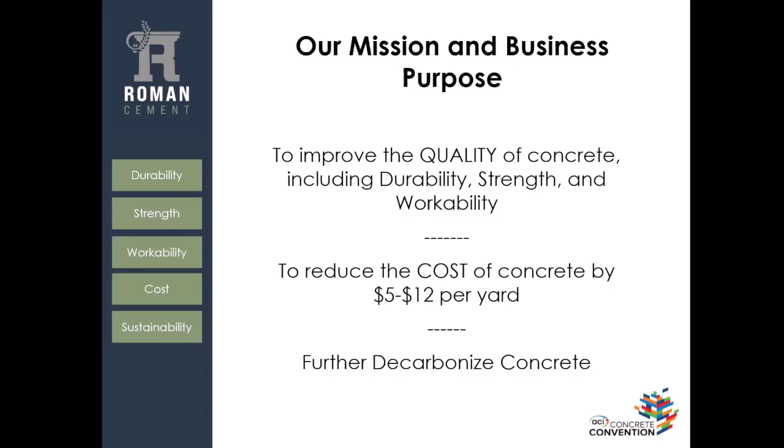We were able to redesign several mixes of ready-mix companies in California and in Utah, and from the materials cost standpoint, reduce the cost by $5 to $12 per yard. We were able to improve the quality of concrete. We don't try to increase the strength, we try to match the strength, but we did some durability tests and they came out very good, and the workability is very good. Even though we call ours a low-carbon concrete, because of the way we use a mineral filler, we're able to maintain very good workability.

So everybody knows this. Okay. Yeah, sorry. Okay, so everybody knows that...

Typical concrete always has cement and one or more supplementary cementitious materials. And of course, the point is to create better concrete, to react with the cement, and to make a greener and more sustainable product. If designed right, you get very, very good concrete using those materials.

Like I said, we've always looked at a ternary blended material. Ideally, the cement, the SCM, and the mineral fines wouldn't have the same particle sizes, but in this case, the SCM we used was fly ash, which had about the same particle size as the cement, and then our mineral fines were a coarse limestone powder that we found off the shelf. But we were able to use it to reduce cement content significantly and make what we believe would qualify as a low carbon material under 323, without the workability issues you might have if you reduced cement paste dramatically.

As we know, typical supplementary cementitious materials like pozzolans, fly ash, and slag will have a strength retarding effect.

They ultimately yield great strength, but early on they have a retarding effect. By using this coarse limestone powder, it has an accelerating effect, so they offset each other, and we get very good results.

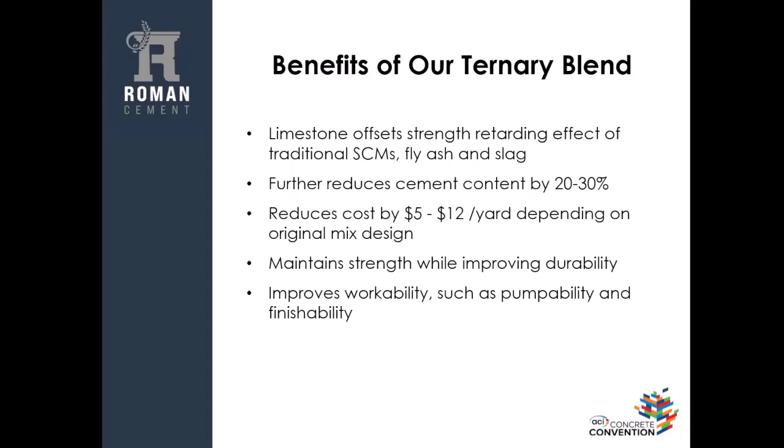So anyway, here I'm going to get into the mix that we redesigned. Again, this is just an impressionistic version of our idealized cement material. Okay, so this here would be the mix design.

This is the city prescribed mix design: 489 pounds of cement per cubic yard, 122 pounds of fly ash per cubic yard. We reduced the cement by 20%, nearly 100 pounds per cubic yard, and reduced the fly ash by 15%. So the total cementitious went from 611 pounds per cubic yard to 495 pounds per cubic yard.

And then we replaced that with 150 pounds of pulverized limestone, which still was quite a bit less expensive than both the cement and the fly ash, so ultimately the cost went way down, even though we had to use a little bit more admixture to get the right flow. But we had a target air content of 6.3%, and the slump had to be about 5 inches.

We did this project for the rechargeable bus station, and we found that it pumped well. It seemed to behave exactly like the concrete that everybody's used to. It finished well. There's the aerial view of how the bus station ended up looking.

Here is a letter of commendation from the contractor who did this, and they liked the fact that the concrete met or exceeded their expectations in terms of workability and how it flowed.

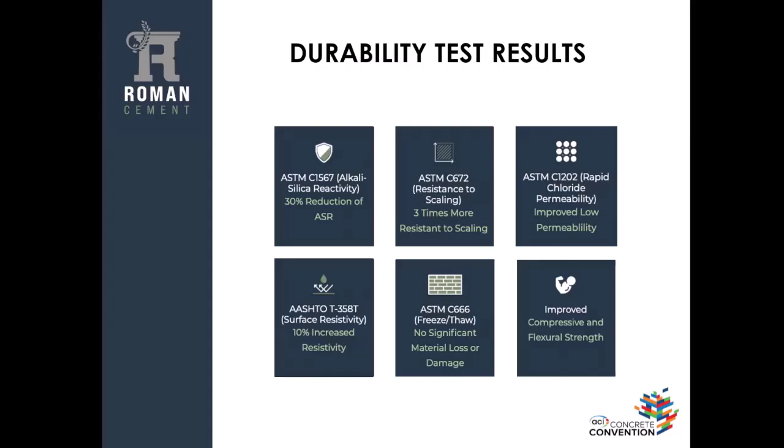Theoretically, it's because our cement paste matrix was less porous, since we have a higher particle-packed cement system with the limestone powder. We improved the rapid chloride permeability test, and surface resistivity went up. Freeze-thaw was about the same. And we had improved compressive and flexural strength compared to the control mix.

Some of our partners we want to thank: the City of Salt Lake City funded the project for the bus stop. UTA, the Utah Transit Authority, for the rechargeable bus station. Geneva Rock was our concrete producer. Stacy and Witbeck was the general contractor. CMT was our engineering firm who did a lot of our testing before we poured, and Altiview helped us do the durability testing.

That's all I have, and I was curious if anybody has any questions. Any questions for John, Director?

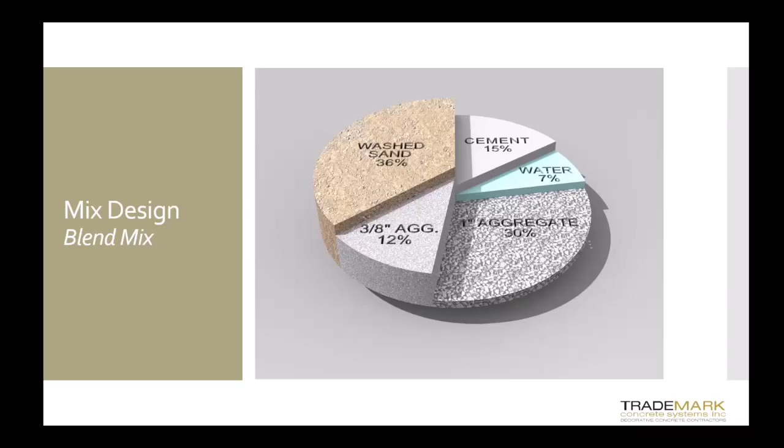We used a blended mix design, pumpable through a 3-inch line if needed. We were limited with some access issues at the grounds there. Probably the biggest hurdle when it came to concrete was the temperature—110 degrees in Sacramento in the middle of summertime. So we worked with Cemex, the ready mix provider, and we were able to get concrete at 5 a.m. every day just to make sure we could control our pours.

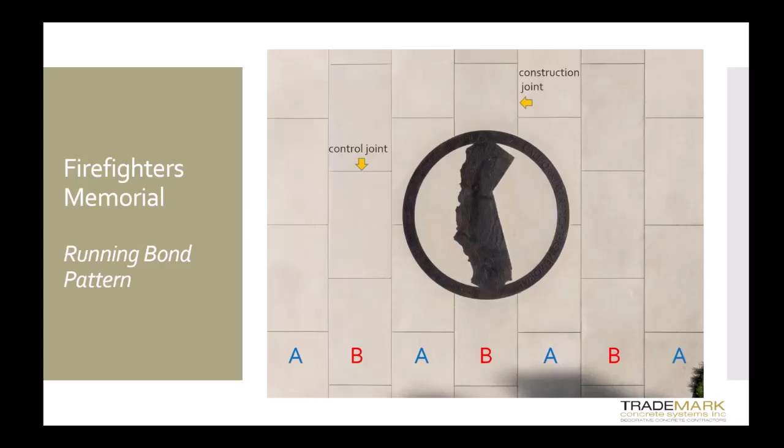We had a 3/16 saw cut control joint, with isolation joints at the vertical structures. There were benches and sign walls that had template sandblasting, which you'll see in some upcoming photos. Here was how we poured it—you can see the control joint versus the construction joint. Centered in there is a bronze inlay that's 8 feet in diameter, so we softened the coastline a bit to prevent cracking. We poured it in 3-foot wide lanes in the running bond pattern and used a color hardener for the final color.

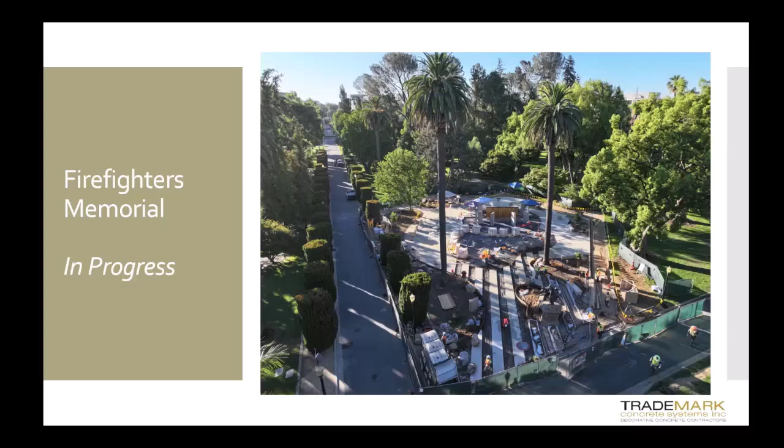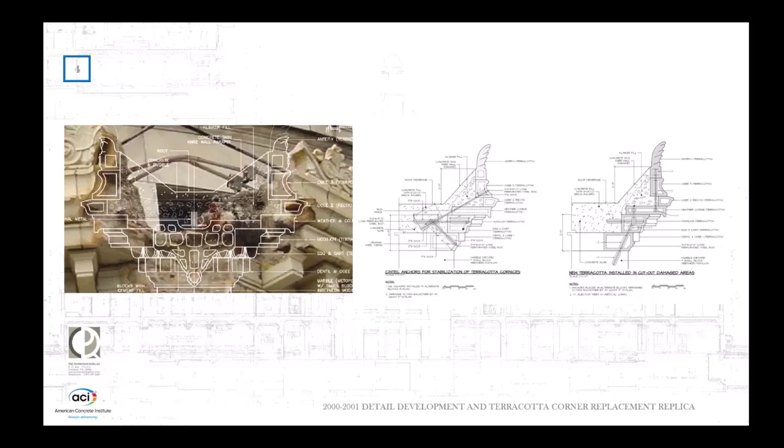This is the first time I've ever heard of Cintec, which you see some sketches of here. We spent about 4 hours doing sketches of how to preserve the 7 courses of terracotta so that we could, at the same time, understand how to reattach them. If we dismantled the corner, it was not that hard to put back, but we were trying not to dismantle the entire cornice with the base of the Capitol.

That was some time that we spent, and again it took us like 5 or 6 years to get another project back on track. At the same time, I had convinced the superintendency to go ahead and do the molds for the terracotta pieces. To give you an idea, there are 7 courses of terracotta and 1,568 pieces overall around the base of the Capitol Dome - that's how complex this thing can be.

When we started this project, we understood we had sort of a crisis because other areas started seeing some modillions falling at the same time. We even made the newspaper - it said the building is falling apart, and time is passing on the building and making it worse. At the same time, at the main entrances, we were seeing some collapses and so forth. So we were trying to make this - instead of historical preservation, hysterical preservation - to get the message through.

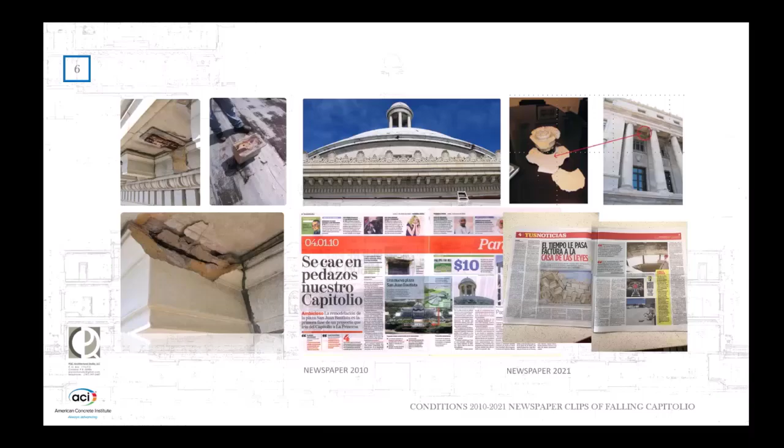Finally, we go all the way to 2022, and we got called by the superintendency because they were trying to do a restoration of the mosaics in the atrium. I told the superintendent, you can't do that unless you do the dome first, because it's the highest point in the Capitol building, and you need to address it.

Being architects for the superintendency since 1985 or 86, we had 30-plus years of collecting, because I took it as a passion or a mission to collect every single drawing I could of the Capitol of Puerto Rico, and this proved to be essential for our project.

I even got the original structural design of the Capitol - a 1924 drawing, hand-drawn, and these sections you see there are also original drawings. These photographs show that in 1929, this is the era, more or less, where the dome was being built. So these photographs were all instrumental in us understanding what we were dealing with, in essence.

So now we have the project. Thanks to the digital drawings, all our terracotta pieces were organized sort of like a Lego puzzle, each one with a specific code. Gladding McBean, the supplier, was convinced by the superintendency to purchase the terracottas in advance, because terracottas take anywhere from 4 to 8 months from original intention to actually getting the material on site. So we purchased the terracottas ahead of time when we finally decided to bid the project.

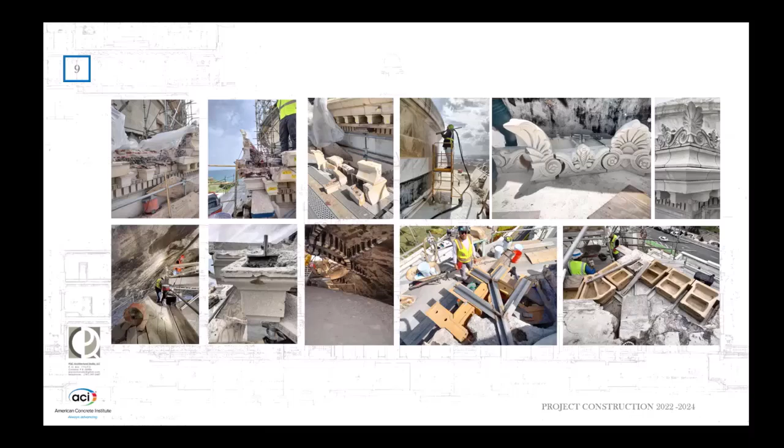So what happens after we get all these drawings? We went into the bidding process, and we were fortunate, what I call a double whammy, because we got a contractor that happened to be a structural engineer also. We had Izquierdo, and then we had the contractor Jose Gaya from BPMT. I'm trying to abbreviate this very complex process, but the corners could be easily installed, while the other pieces were done in Cintec, and Izquierdo will go into more detail with this.

As you can see, the pieces had to be hand-colored. Edison Coatings was the supplier for some of the finishes for the terracottas and so forth. And here we are seeing the results of the final project.

And we were able to preserve the interior, which is the mosaics. Well, the architect always wants to fix more. We're done.

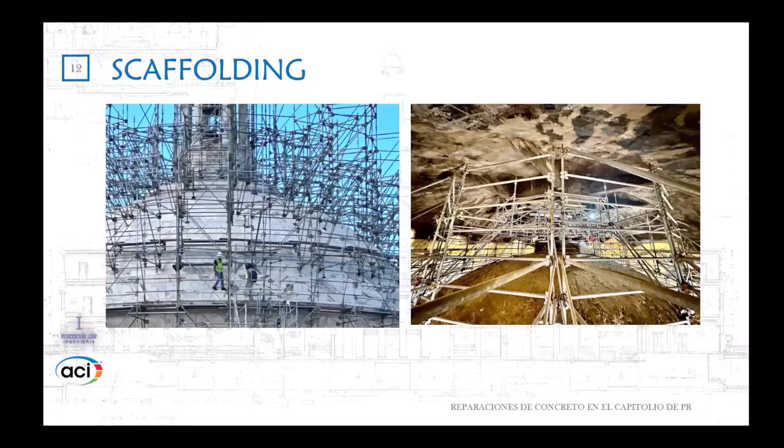Let's try to do this in 2 minutes. A recognition to the scaffolding guys, they did a fantastic job. All the exterior scaffolding is curved. The interior between the two domes is curved, and it was essential for the performance of the contractor.

This gives you a section of the original construction plans, which we were able to review and verify the rebars. You can see there are two domes, both made out of concrete. The one that caused us trouble was the exterior dome. We don't have time to explain the complexity of the structural system, but the inner dome is not supported directly into columns down there—it's supported between beams, circular beams, and other columns.

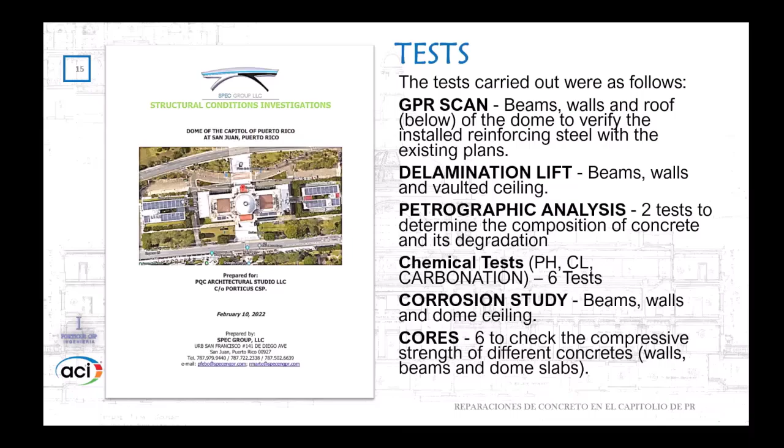We did what is very important, according to ACI Code 562: testing everywhere. It was a great lab, the spec engineers did all kinds of testing. And the important finding was this: we found extensive honeycombing in the exterior dome from 1926. We think that because they were afraid of the big angles of the dome, they used a very dry mix. ACI had only existed for 15 years when this was done, and the code was just 16 pages, published in 1910.

This was a big problem. If we had to repair it from the outside, we would have to take out the marble, and the project would have gone nowhere. So thanks to the support of Master Builders, now Sika, they recommended a micro cement to inject from the inside—a micro cement used to stabilize tunnels inside mines.

Following the diagram on the right, we injected every 16 inches in circles from the bottom up, always from the bottom up, using low pressure injection, only 30 psi. We just wanted to fill the voids, and the contractor had to watch that there would be no micro cement coming out on the exterior to damage the marble. It happened about 5 times that the micro injection went outside.

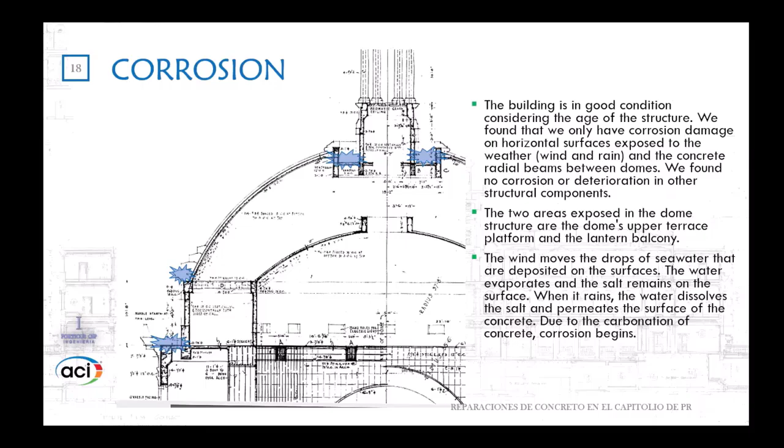The basis of the corrosion was on horizontal surfaces between the dome construction, where salt water, like Pablo said, deposited. Every time it rains, the salt water goes inside the structure, and that's why they were using these repair techniques.

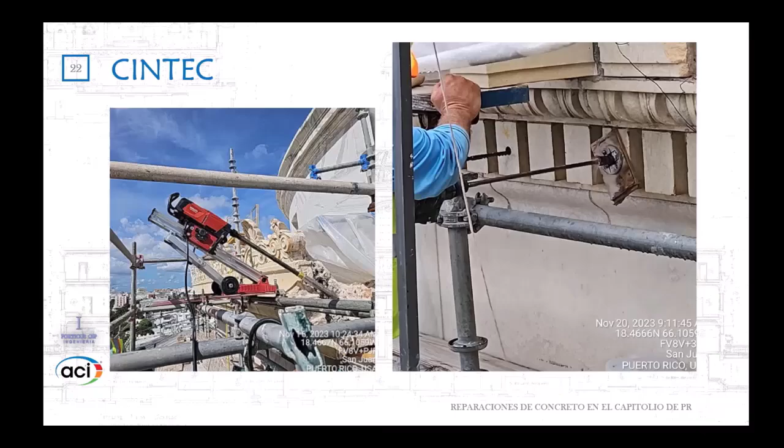It's very important to detail the drawings—photos of the damaged beam, the repaired beam, and the terracottas which had much larger damage. This shows you the process of the Cintec. This is a very important European technology: the rod is inserted into a good attachment area, solid, and then it goes in with what you call a sock, and then you inject a grout, so it grows and makes everything bond together without causing extra stress. Then you tighten the rod and everything stays in place.

The contractor made a redesign after we saw the extensive damage. This is on the corners—we needed to do some extra structural work. We used stainless steel angles and concrete beams, and it was injected.

And I wanted to show these 2 pictures. At the end, artists with a small spatula finished the project, to make sure that all the ornamental terracotta blended. We received an award from the architects in Puerto Rico, and we're very humbled by the ACI award. Thank you.

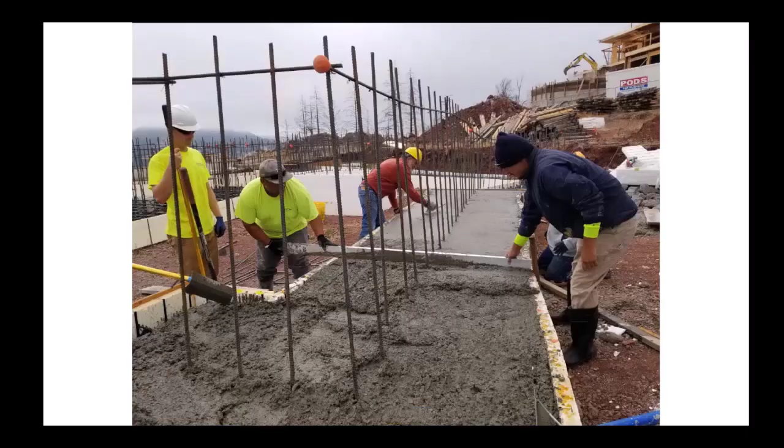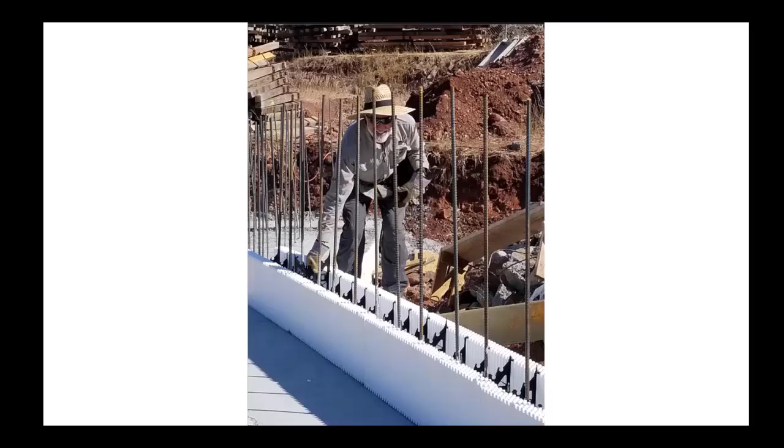This is the placement of the first row of the ICF forms. Again, there's the styrofoam, the brackets that connect them together, and the other piece of styrofoam. Those black brackets actually are the studs in the wall to mount whatever you want, drywall, whatever it might be. So when the wall is finished, you're done. There's no wrapping, no insulation. Put your brick or siding on the outside, drywall on the inside, and you're done. It makes this process really, really fast.

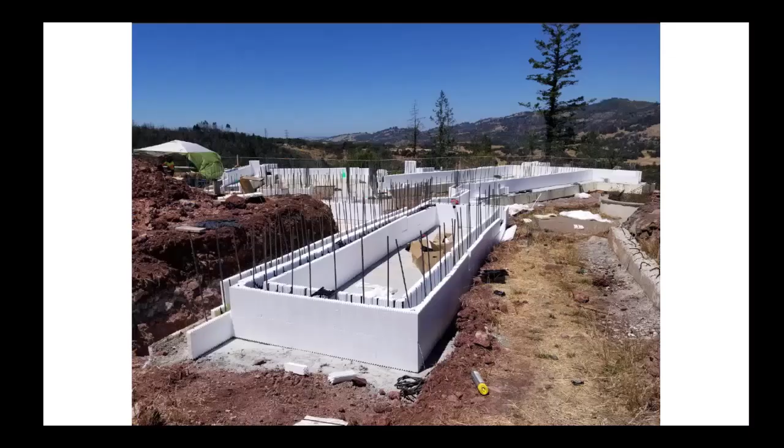This is the first row of forms going in, sorry. They're putting in the slab rock to fill it, and then doing the same there, and they'll be compacting it as they go along.

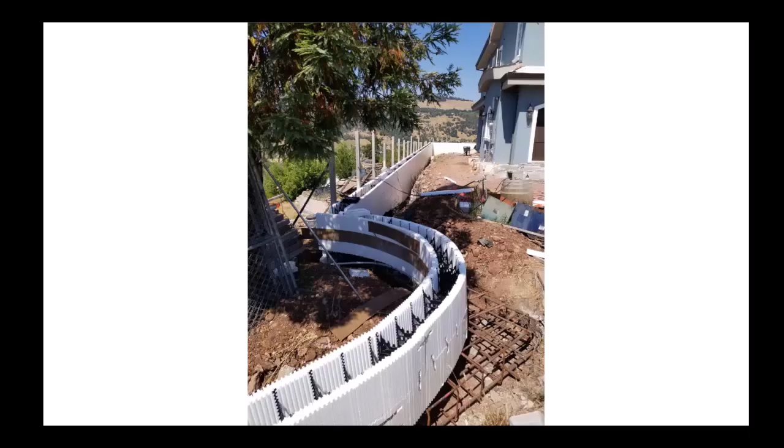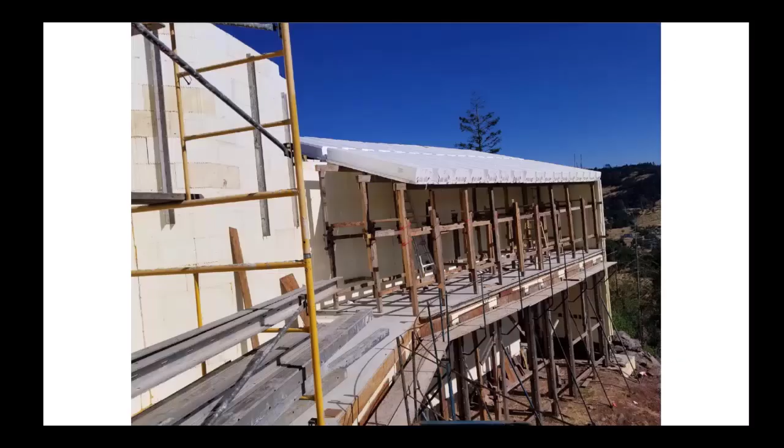This is the second floor of ICF walls going up. And then this is the cantilever balcony, which is another innovative thing that Nicholas developed. A lot of people that do ICF walls don't do ICF roofs. Nicholas has been doing them for 5 or 10 years now, and he's invented the whole process of getting that concrete roof done at the same time you're doing the walls.

So again, at the end of the day, you end up with a cave above ground. And if you've ever been in a cave, it doesn't make any difference what the temperature is outside. If it's 25 degrees, it's 67 degrees in the cave. If it's 100 degrees, it's 67 degrees in the cave. It's the same thing with an ICF property.

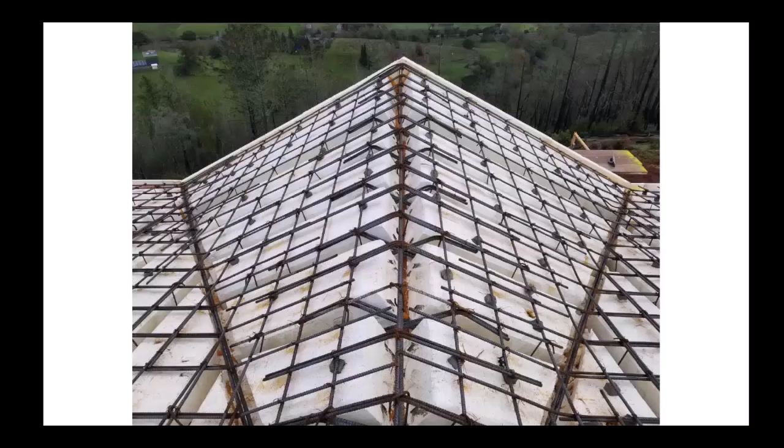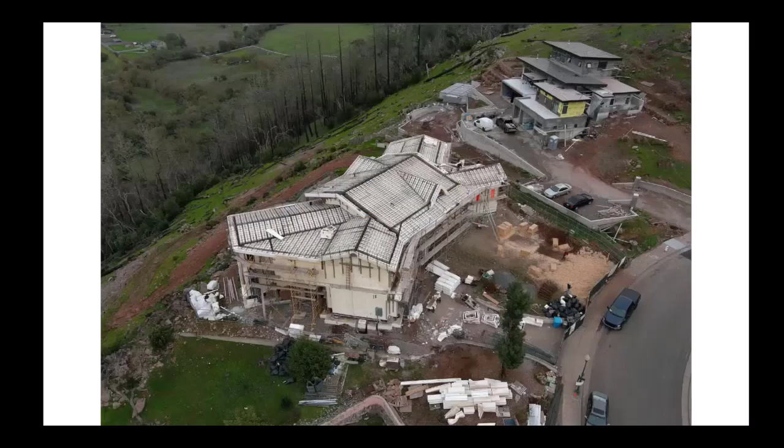This is the ICF roofs, the outdoor roofs getting ready to be poured, and the pillars again. Here's them actually pouring the ICF concrete into the roofs. Another shot of them pouring the upper walls and the roof. Here's a drone shot of the completed roof section, getting ready to pour again, and that's a completed shot of all the wall structures and roofs, all done and poured.

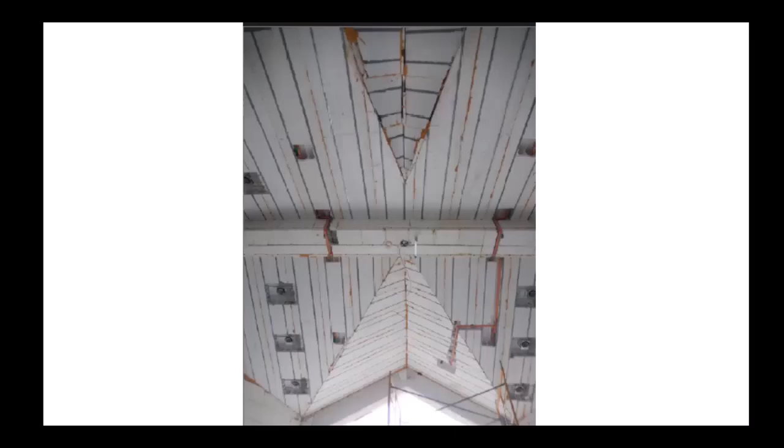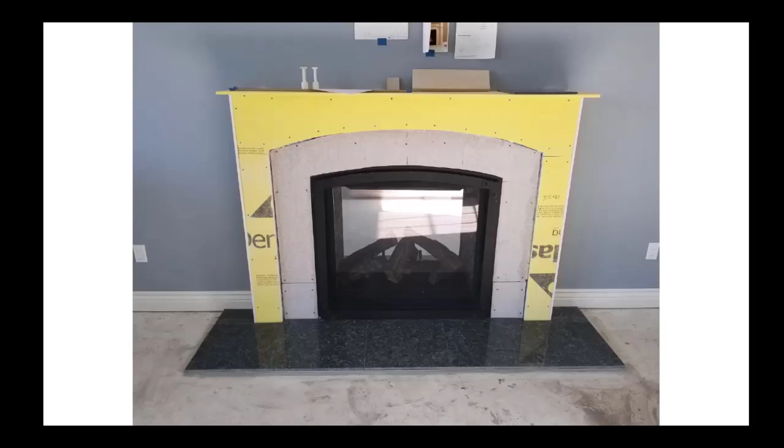This is the framing of the double-sided fireplace, and then the finished fireplace. And then the double-sided master bedroom fireplace, and then the finished fireplace. And this is IntegraSpec's demo

They do this at all the World of Concrete shows and builder shows that they do. So that's it. Any questions?

I'm in the Maryland area. I live in Columbia, and we're actually promoting ICF in this market. It's becoming a more popular way to build houses, especially since people are pushing net zero and want a nice, quiet home. So if you ever need to reach out to me, I'll give you one of my cards, and we can talk about how that might happen. And we are looking for builders and people that want to learn this technology. Thank you so much. Good. Thank you, Tracy.

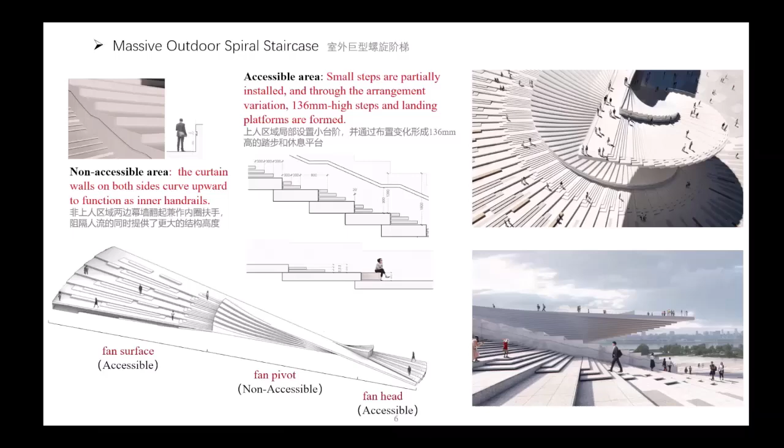The fan surface is a steel frame structure composed of circular main beams and radial secondary beams. Circular supports are arranged at the edge of the fan surface to ensure the stability of the overall structure.

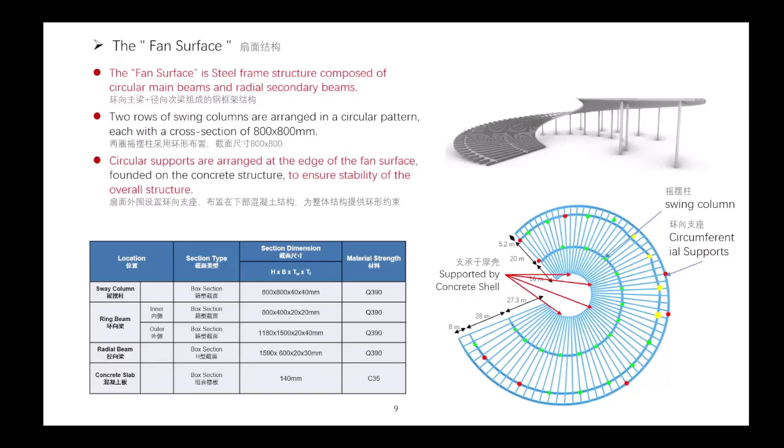The cantilever length ranges from 9 meters to 15 meters, accounting for the architectural finishes and the ceiling construction. The effective height is only 725 millimeters, so the span to depth ratio is 21:1.

The cantilever beams are prefabricated pre-stressed UHPC beams arranged radially and anchored to the concrete shell. Adjacent prefabricated UHPC beams are connected with cast-in-place UHPC joints to form an integrated structure and achieve waterproofing and durability of the outdoor staircase.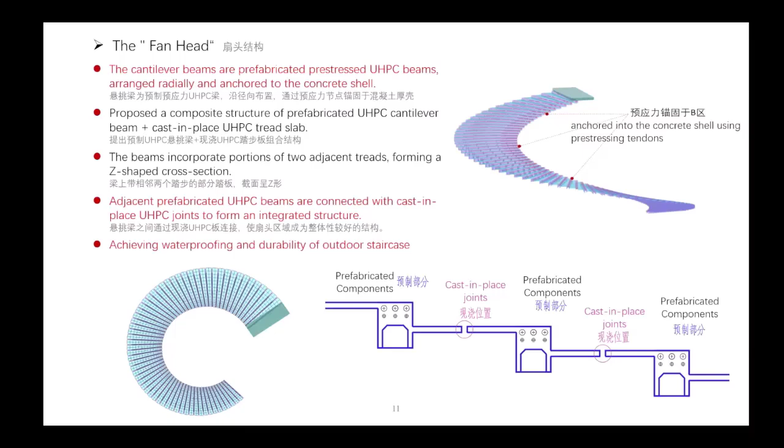The UHPC beams are connected flush with the bottom of the concrete shell. The compressive strength of UHPC is 150 megapascals, and the tensile strength is 8.5 megapascals. The cross section is formed rectangular to a Z shape, minimizing the self-weight. Pre-stress is applied to fully utilize the high compressive strength of UHPC.

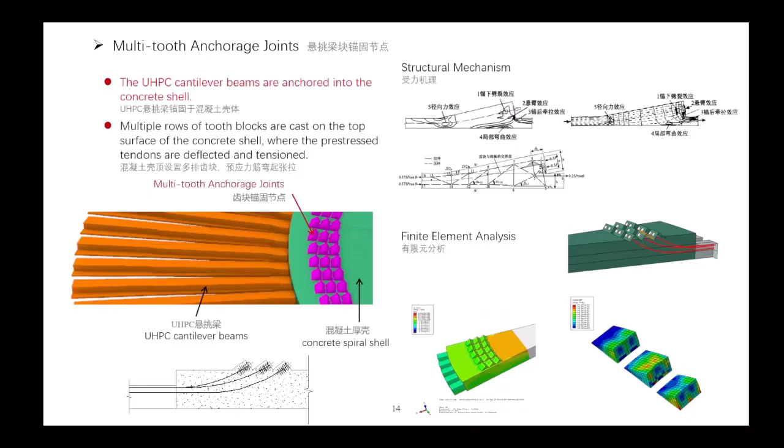The UHPC cantilever beams are anchored into the concrete shell. Full-scale tests were conducted on 2 UHPC cantilever beams, and the maximum test load reached 1.7 times the design load, with a maximum deflection of about 770 millimeters.

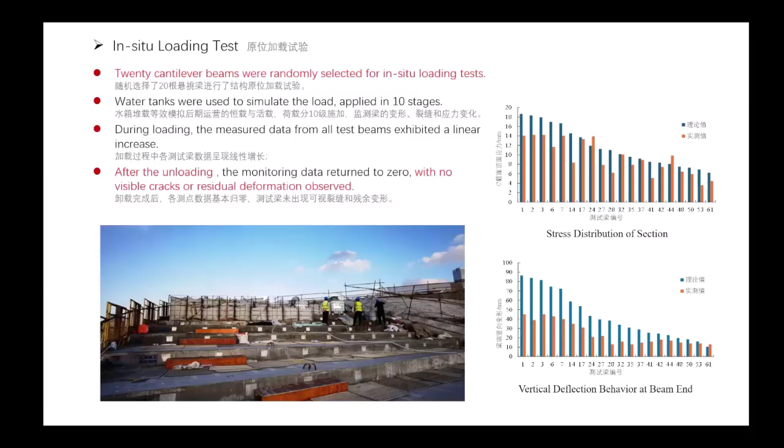A total of 45 mass dampers were installed. The results showed a significant reduction in vibration by 47%.

Through collaborative optimization of design and fabrication, only 2 sets of steel molds were used. Mass production was achieved using conventional concrete precast plants.

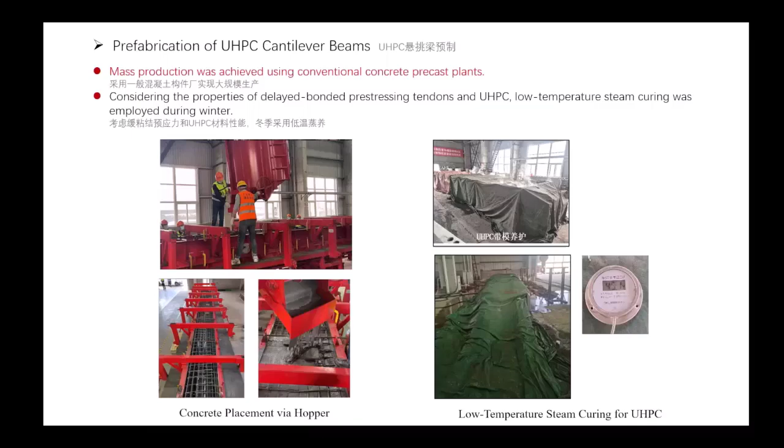This is the construction of the concrete spiral shells and the installation of UHPC cantilever beams. These are the key construction milestones. The roof started on July 1st, 2022, and topped out on October 21st, 2023.

A summary of the construction.

These are some photos during the construction, and the architectural finishes and decoration were finished.

Two weeks ago, the Global Engineer Congress was held in Shanghai, and engineers from more than 60 countries visited the project. The key innovation of the project is the seamless integration of architectural design and structural technology, along with structural testing, in situ loading tests, and structural health monitoring, validating the safety and serviceability of the new structural system. The Shanghai Grand Opera House marks the first application of UHPC technology in large-scale public buildings in China.

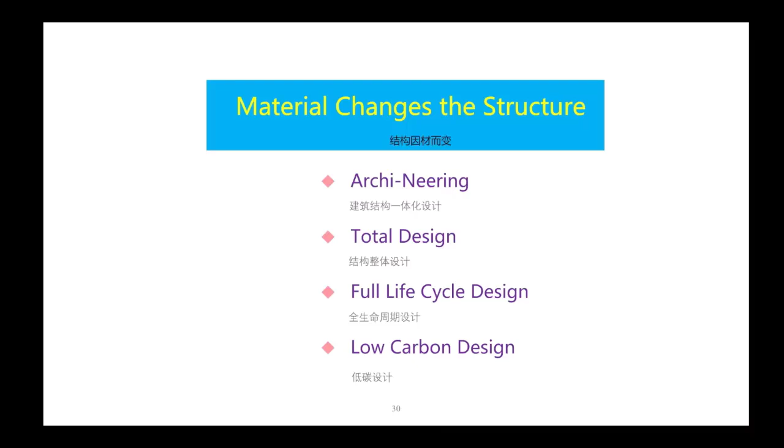In short, it's high-performance materials changing the structure through archi-neering, total design, full life cycle design, and low carbon design. At last, I give thanks to the owner and the team, including architectural design, structure design, general contractor, UHPC supply, and so on.

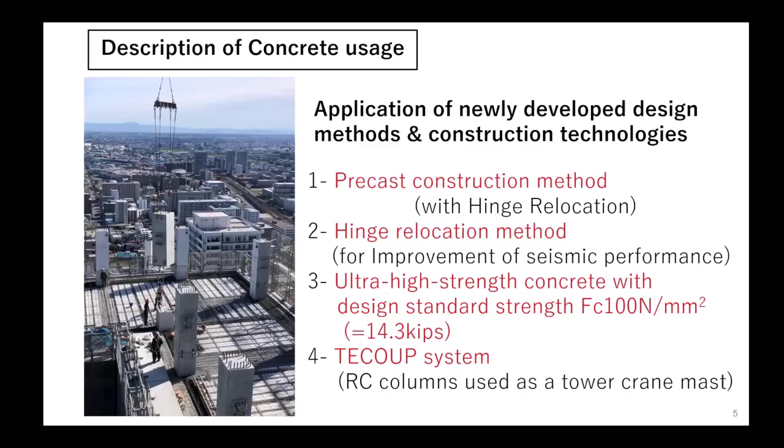First, the precast construction method with hinge relocation method. Hokkaido has a lot of snow, so construction work is restricted in winter. To shorten the construction period, it was necessary to use precast members for the entire building. Japan has a lot of earthquakes, so tall buildings are designed with a moment frame structure.

Especially in a super high-rise building, the structure is a complex concentration of rebar at the beam joint. High viscosity concrete is difficult to cast inside, so it's best to use full precast columns. So all columns were full precast members.

In addition, beams of 2 floors and above, slabs, balconies, and corridors were made with half precast members. As a result, about 65% of concrete is precast members, so we achieved a 5-day cycle per reference floor. If concrete was cast in place, it took about 20 days. Not to mention, the formworks of concrete members were greatly reduced.

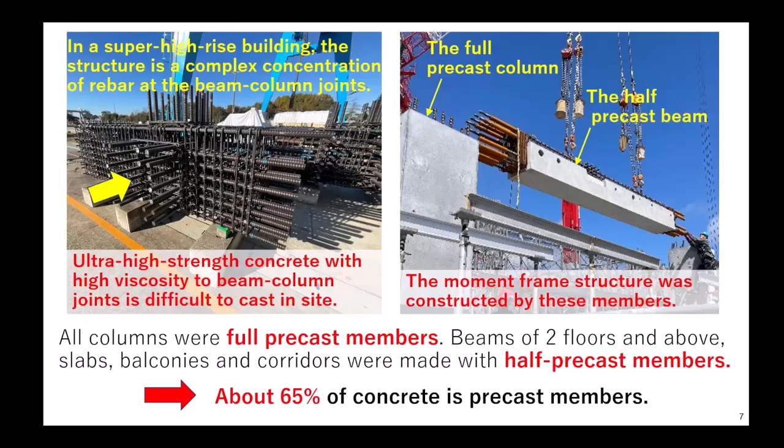Second, hinge relocation method for improvement of seismic performance. To avoid damage at the beam joint rationally, the hinge relocation method is adopted. The plastic hinges are designed at shifted positions of the beams using high-strength rebar and mechanical joints.

We did various experiments and verification, and over a long time, we were able to use this method.

In Japan, the design and construction may be contracted by one company. In this case, the structural designer considers what the best construction method is. This shows the hinge relocation method applied at the construction site. The precast columns and beams are simple and completely separated. Also, the extension of the beam and bars is short.

The hinge relocation method has great advantages, not only in improving seismic performance, but also in manufacturing, transportation, and construction.

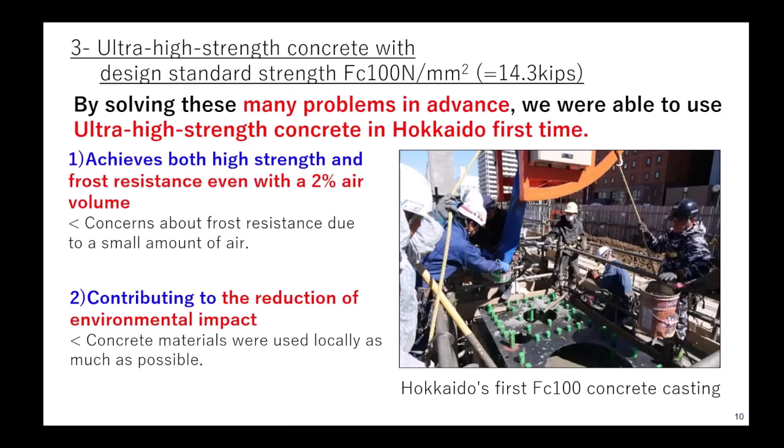Fourth, the TECOUP system. TECOUP is an advanced construction technology that has never existed before. This system uses the core columns of the building instead of a tower crane mast. Here is how TECOUP affects construction: no floor remains uncompleted, and we could install it at any position.

This project is the first step using this system. The TECOUP system was realized using the hinge relocation method, because the extension of the beam and bars is short.

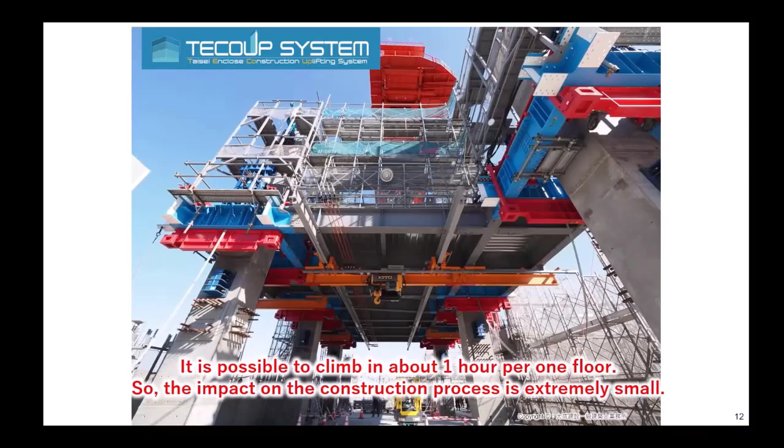Next, a video of the TECOUP system. It is possible to climb about one floor per hour, so the impact on the construction process is extremely small. It greatly contributed to achieving a 5-day cycle per floor.

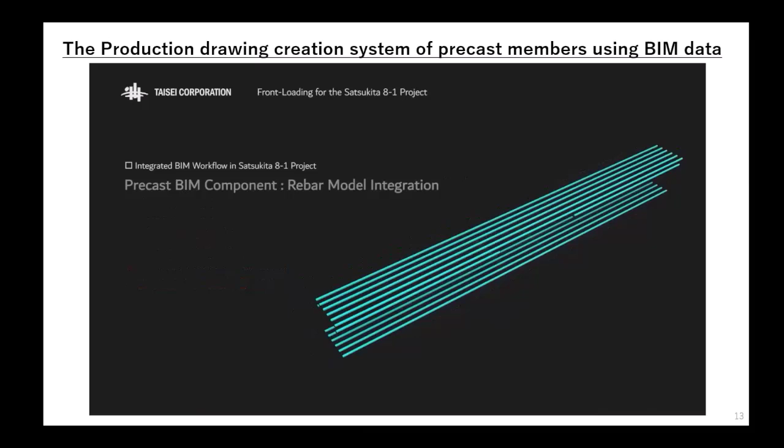Finally, we will show the production drawing creation system for precast members using BIM data. It saved a lot of effort in doing so.

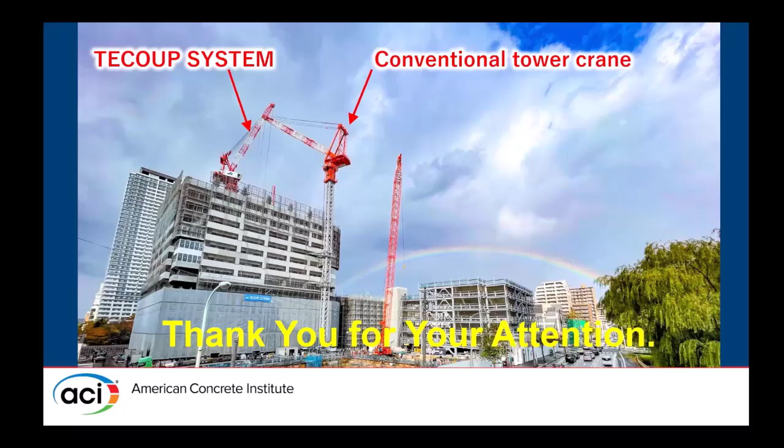Do we have any questions? All right, thank you so much. Okay, thank you. Wonderful project. Congratulations.

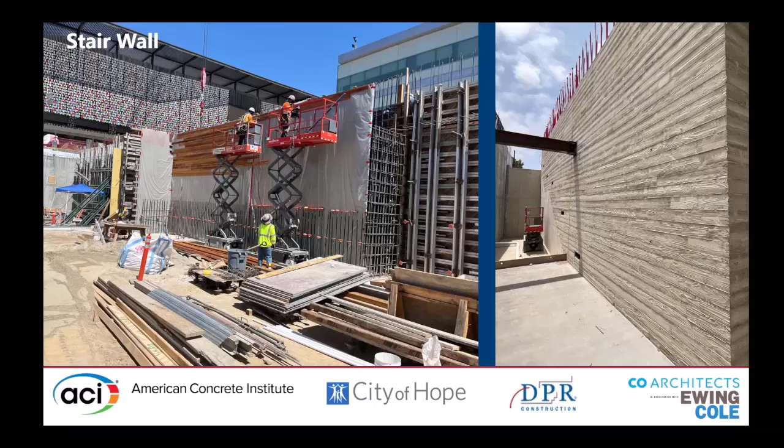We wanted it to represent those kinds of textures of earth and erosion, so we used board-formed concrete with white cement. This is one of the first walls we put up in the basement. The project is actually 8 stories tall with a basement at the bottom.

Seeing some of the structural presenters, I'm not going to go as in-depth into the structural design, but there was a lot of architectural concrete, so the primary focus will be just these two walls, this one and then the one you'll see in a forthcoming slide.

Ash mentioned the concrete board form and the challenges of a 20-foot tall retaining wall. This one here is spanning about 40 feet, so we had to introduce an integral bond beam and traditional retaining wall design. We do one-way design, but in this case we had to do a finite element analysis to find the distribution, and as you can see, we had to introduce an element to cut down the span.

But yeah, we'll go into more detail on the next wall here.

For the construction of this wall, the design strength was 5,000 psi. The actual mix, when we got it, the breaks were coming in at 7,000 psi, so we were going above and beyond the straight structural requirement. We used type I white cement, also 3/8 aggregate and sand.

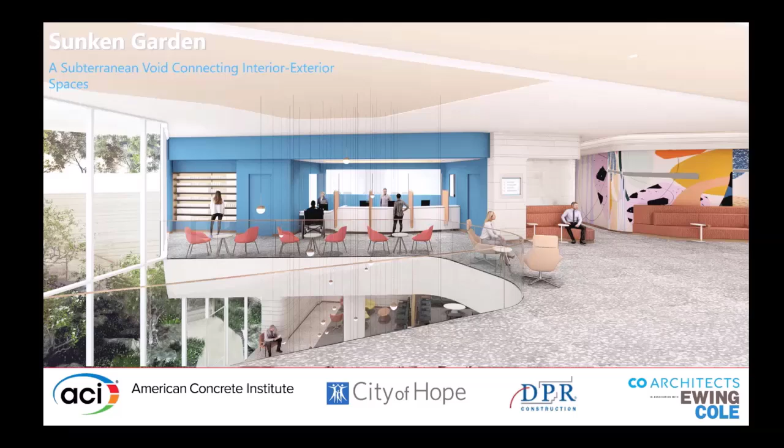So as the patients essentially walk through that public sphere that we showed, there's an area of the building where we carved out - we call it the sunken garden. It's a void that connects the exterior and interior together, and it also has this ribbon spiral that wraps itself around the building.

Probably. Yeah. So this here is a kind of unique design.

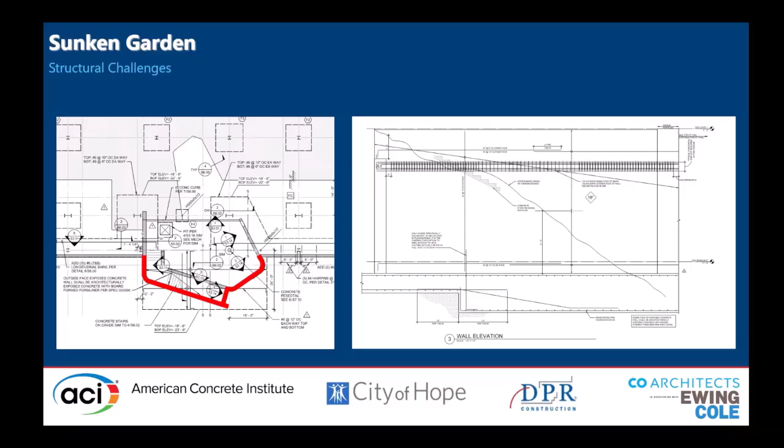When you have a large spanning retaining wall usually you have to make it really thick with a lot of reinforcement. In this case, we utilized the geometry of the wall itself and didn't have to introduce intermediate support. We saw it as a sideways or horizontal truss, or horizontal arch, which we modeled with the finite element analysis so that we could make this work without introducing any intermediate supports, to really achieve the vision of the sunken garden look.

Frank, you want to talk about that?

I think one of the reasons we're probably all in this industry is because we like the friendships we build on projects. City of Hope as a cancer research institution has a great story, but also the project team - people come together early on in the project before you deliver goods and the architectural wall. You're designing and doing structure well in advance of opening the building. So I love the story involved, because in California...

I don't know if you guys have heard about this, but we have atmospheric rivers now. We used to get a fraction of an inch and it wouldn't rain for 11 and a half months. So this right here, we decided this is a great spot - the sunken garden, affectionately called - this is where we placed our tower crane. Pablo worked out the structural design for the tower crane. We were about two days away from pouring that tower crane foundation, and we got 14 inches of rain in 3 days, which is more than LA gets in an entire year. So we were about this deep in water, and we had to do it again. I love the backstory, because that's really what makes the project and all these friendships come alive.

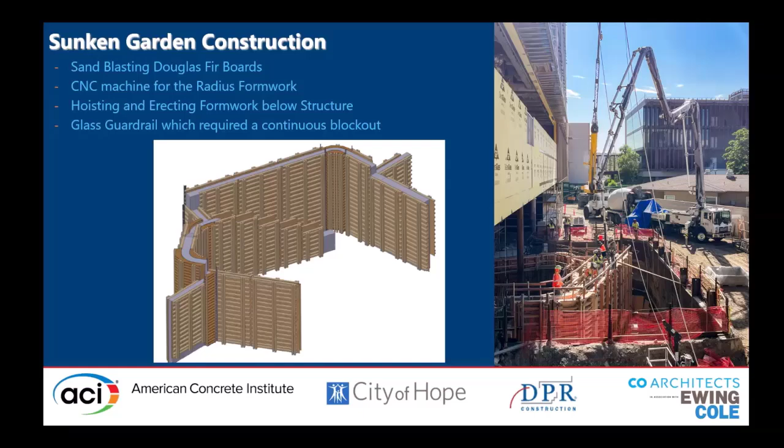In addition to the board form walls, we also have a variety of finishes and different ways of going about the concrete. Andrew, maybe you want to, or Frank, maybe you want to talk about all the mock-ups that we did and the different finishes we're using.

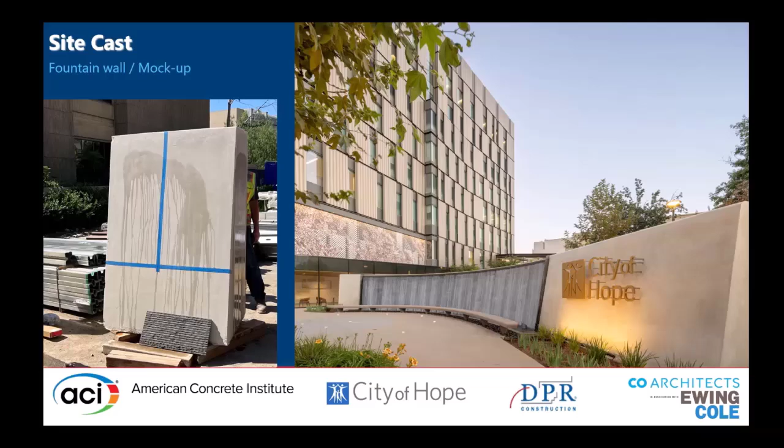Yeah, so for our white concrete, the white cement, we essentially went through a similar process. We had multiple meetings, distinguishing features, what's important, how we're going to achieve this - if you go to the next slide there's another example. We had prefabricated forms, and we figured out how to do that and where we source from. Next slide as well - same thing, precast benches. Everything was so detailed and so out in front that we had time to make adjustments and make sure that when we're building it in the field, it matches the architect's vision and works with the structural design. We did a great job on all of them by identifying those details.

And again, just a little bit behind the scenes, you see all the courtyards and the decorative concrete. We're actually on top of about 4 or 5 feet of high-density concrete, because this is a medical facility. So there's a linear accelerator in the basement that will shield all the radiation. So all that needs to be coordinated in advance, because this is actually the basement, it's waterproof.

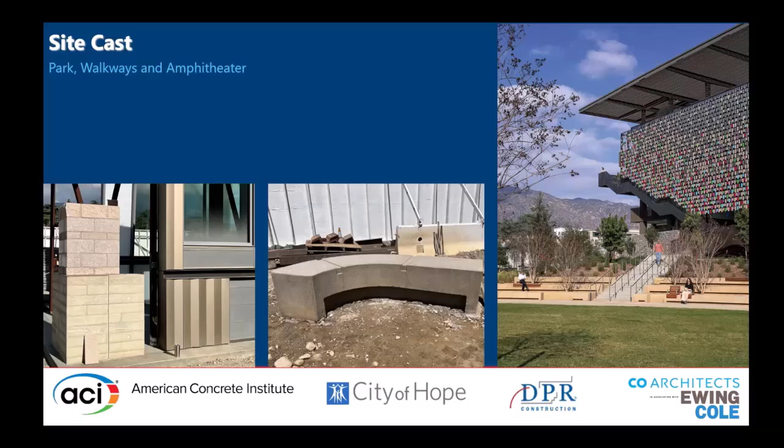And we also did as many mock-ups as we could, trying to get things right. And it always becomes apparent that the first try could always use improvement. So having a great team that is willing to make sure that things are right, and not just on schedule and on budget, I think really helps to bring a project of this magnitude together.

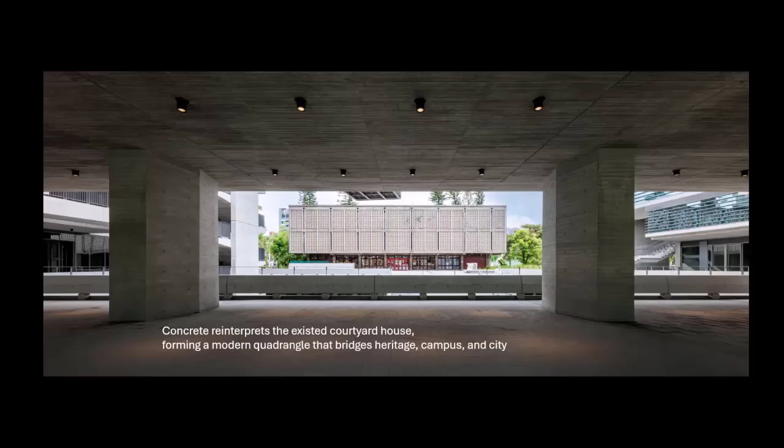National Taiwan University Humanities Hall stands as an emblem alongside its iconic heritage main gate, College of Liberal Arts, and the Royal Palm Boulevard. Concrete reinterprets the existing courtyard house, forming a modern quadrangle that bridges heritage, campus, and the city.

The 50-meter steel truss, supported by monumental concrete columns, spans over the sunken courtyard, offering an unobstructed view of the historical architecture. Concrete shear walls enhance the hall's seismic performance by 100%. The steel truss is filled with high-flow, self-compacting concrete to improve fire resistance, corrosion protection, durability, and seismic performance.

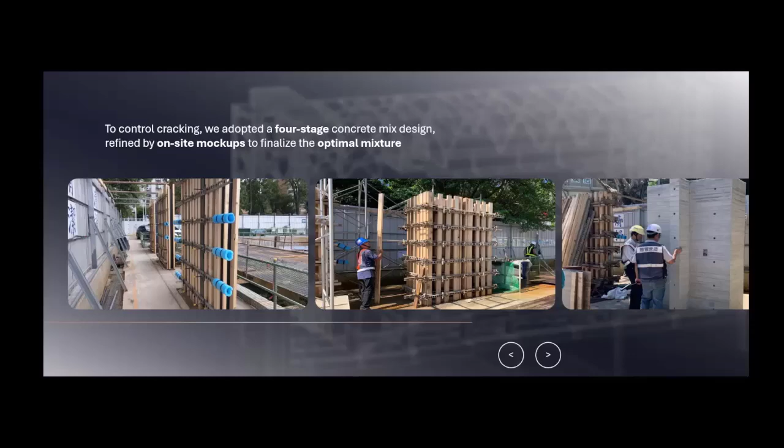To control cracking, we adopted a 4-stage concrete mix design, refined by on-site mockup to finalize the optimal mixture. By integrating BIM technology, the entire structure was divided into 117 concrete pouring units.

For the 50-meter-long steel truss, a post-cast segment method was used. 3 main segments were cast, each cured for 28 days before placing a 60 cm wide post-cast strip. This released 28% of the concrete shrinkage stress, effectively preventing cracks.

Various architectural details show the workability and versatility of concrete. National Taiwan University Humanities Hall is shaped with fair-faced concrete cast using cedar formwork. The natural grain, animated by light and shadow, conveys a quiet resonance with the building's humanistic spirit and bridges the dialogue between past and present.

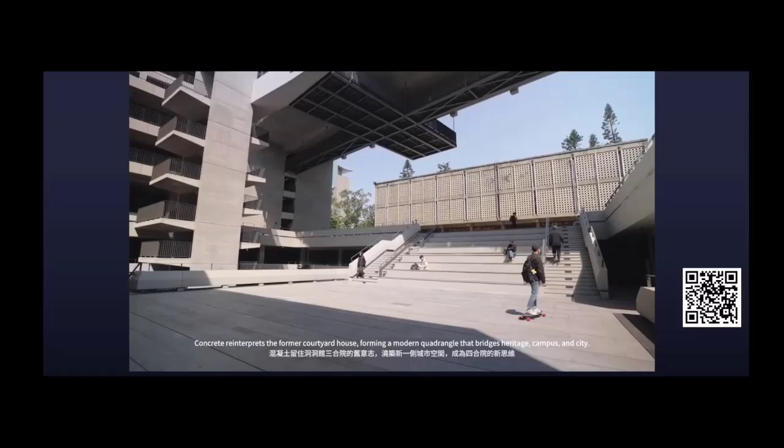The 50-meter sky bridge, supported by monumental concrete columns, spans over the sunken courtyard, offering an unobstructed view of historic architecture. Concrete shear walls double the structure's seismic resistance.

Steel frameworks of the sky bridge are enhanced with HPC, ensuring fire resistance and corrosion protection. No coatings, no additional finishes.

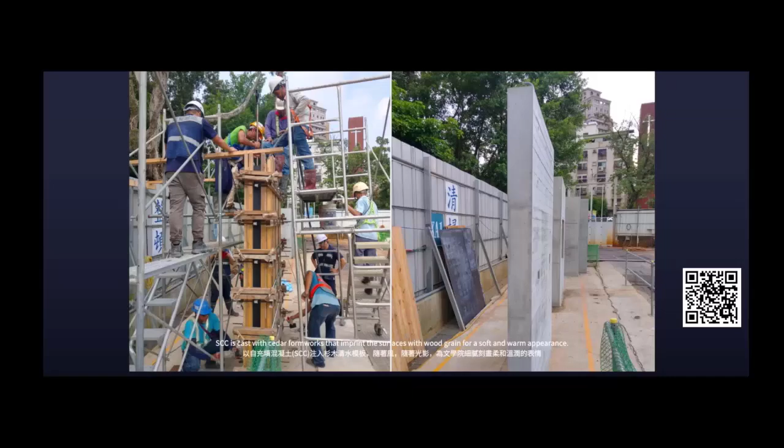SCC is cast with cedar formworks that imprint the surfaces with wood grain for a soft and warm appearance. Mock-ups and testing are done to evaluate and refine the mixture, techniques, and aesthetics, while BIM assists in achieving accurate execution. Various architectural details show the workability and versatility of concrete.

Sustainability begins with how we mix the concrete. Dredged river aggregate replaces quarried stones. Slag is used instead of cement, reducing carbon emissions by 2 million kilograms. A low water-binder ratio enhances durability and serviceability.

Precast UHPC sunshades at 3 angles efficiently lower heat loads. Each concrete pour is a firm commitment. No haste, no compromise, in concrete and in the human spirit.

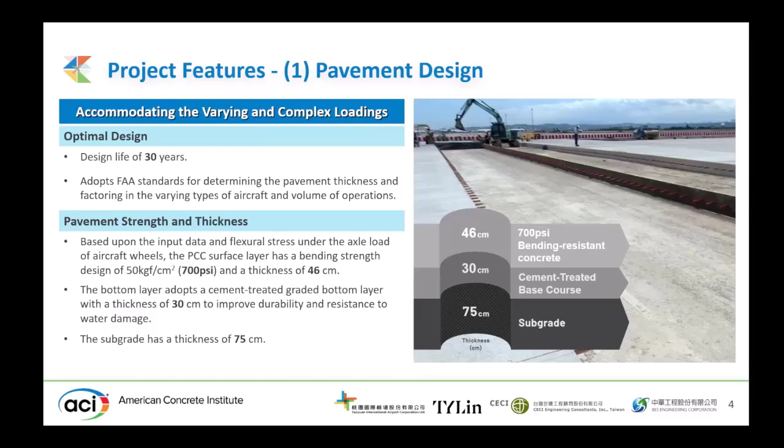The layer below the surface layer is a cement-treated base layer, with a thickness of 30 centimeters. These are all designed to improve durability and resistance to water damage.

The second feature: saving cost and reducing carbon emissions. The total volume of concrete in this project is around 260,000 cubic meters, and a considerable amount, 48,000 tons of cement, is replaced with reusable resources like pozzolanic material, which improves constructability and durability. Overall, we also reduced carbon dioxide emissions by 700 tons.

That's the material. The third feature is applying special tools and technology: we developed a testing machine to conduct a heavy-duty vehicle test of the pavement, based on the FAA's spec. For the large apron area, we also adopted lidar technology to apply ground data and analysis to confirm the flatness of the entire apron area. It's an efficient and comprehensive way to inspect a large area.

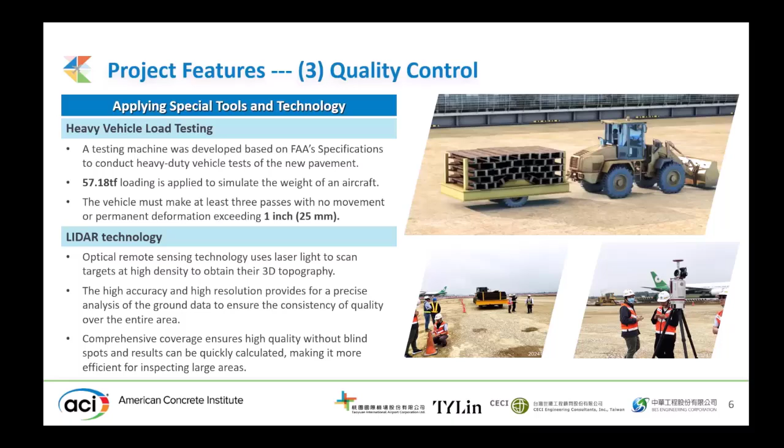Precise measurement and control. We constructed 30,000 slabs in a meticulous way, using steel molds to set the elevation of four corners of each slab. Therefore, we can control the overall slope for drainage. Saw cutting and pouring is also performed with precise steps on site to control cracking.

In answering the specific conditions in every area, besides precision, we apply a curing agent to create a tough and durable water-retaining layer to slow down water loss. It's an effective way to ensure the quality of pavement.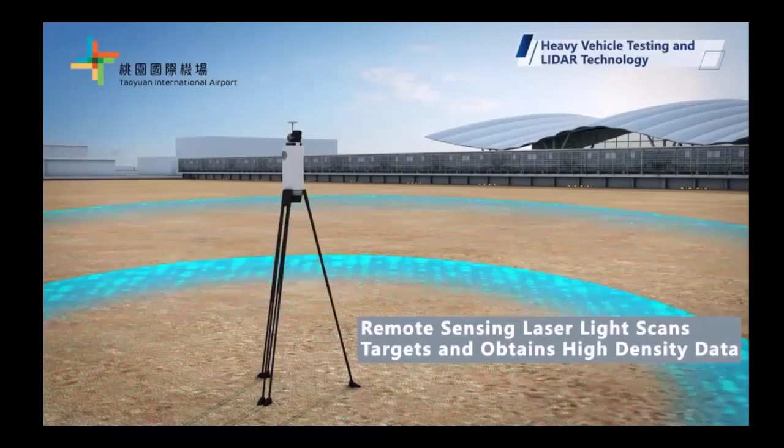Here is a short video to show the critical work at the site. This is the heavy vehicle testing, and LIDAR technology is used to confirm the flatness of the apron.

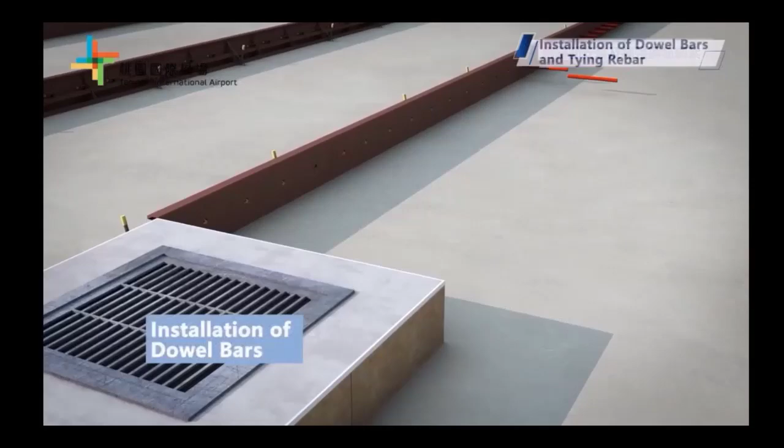5x5 slab. Put the steel mold, and this overall data is design data. Therefore we can have the overall flat area, dowel bar, and tying bar. This is the PCC pouring.

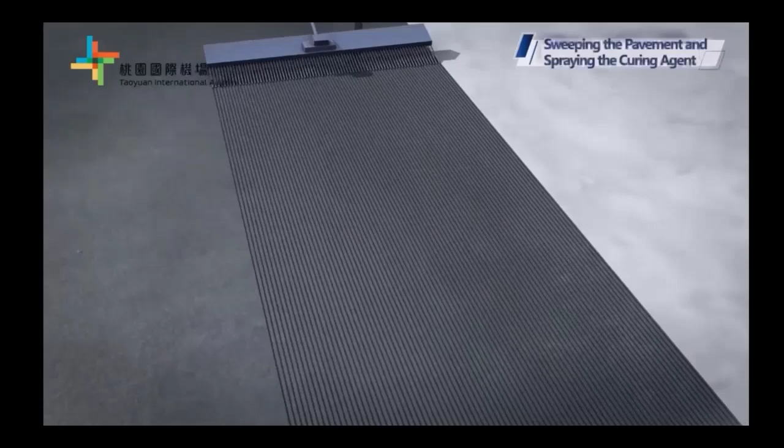Roller paving and leveling. Sweeping the pavement to increase friction. Spraying the curing agent to prevent water loss. Saw cutting, with the elastic sealant.

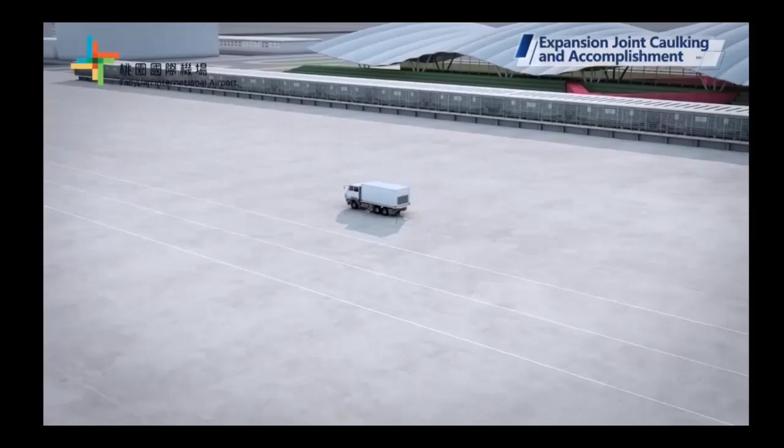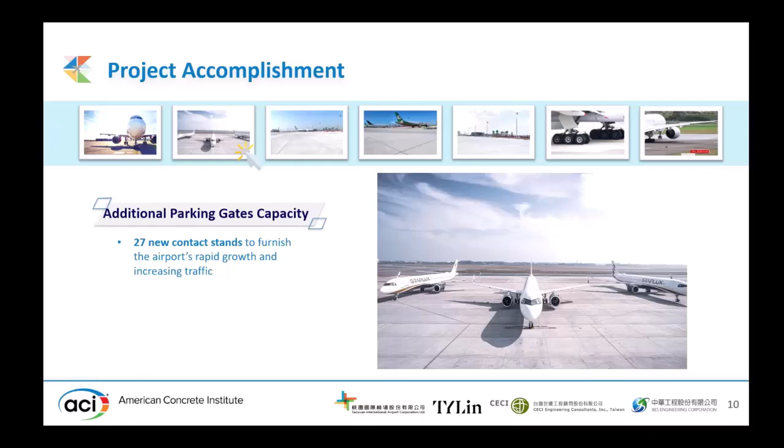Let's quickly go through some features of this project. We have a rich pavement area covering 42 hectares, and we completed additional parking gates, 27 in total, to provide more capacity for growing traffic. 13,000 concrete slabs skillfully joined together without defects.

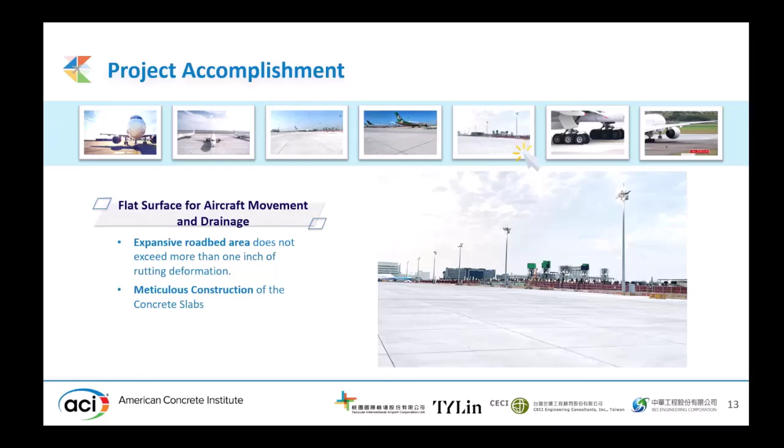A superimposed pavement structure increases strength and improves durability, giving a flat surface for aircraft movement and drainage, resulting from the meticulous construction method for the slabs. A huge volume of concrete accommodates different loading from different aircraft, given the focus on different flights in the future.

Because the loading is so heavy for the aircraft concentrated on such a small area, the loading is totally different from vehicle loading.

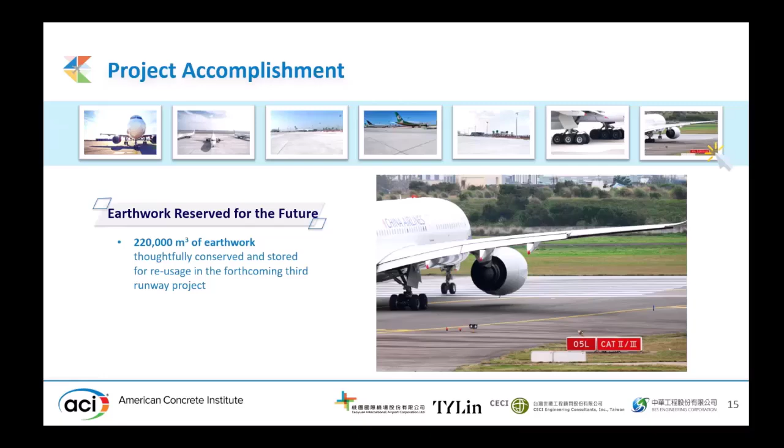We also have 220,000 cubic meters of earthwork reserved for other projects, in an environmentally conscious way. Besides the good condition of the effort, there is something more exciting on the way, because the terminal building is going to open in the coming future.

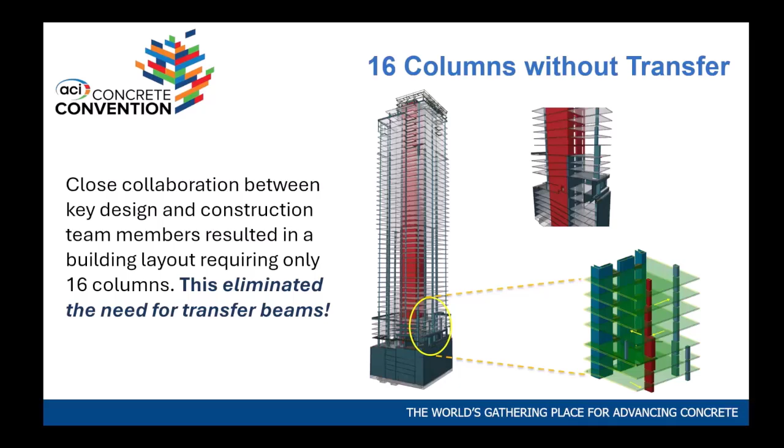Here's a model out of Revit. You can see in the middle the red is the core, going concentric from the foundation mat all the way to the roof, with 16 columns around it. We created some crafty jogging and walking of columns—some walked in 3 different directions—just so we didn't need any transfer beams. We call it the dynamic base, which is grade level all the way to the top, which made things much easier, less congestion, and eliminated transfer beams that could impair occupancy of floors.

One of the cool things we did—this is supposed to be a video—because we had high strength, you can see here the column, which was 15,000 PSI concrete, and the slab was 6,000 PSI concrete. So we don't have to do puddling, which the code normally requires. I don't know if you guys know puddling—you basically take another mix of concrete and put it on top of the column to intermix, because you don't have so much differential between the slab mix and the column mix, making the column-slab sandwich right here. I'm going to click to see if the video works.

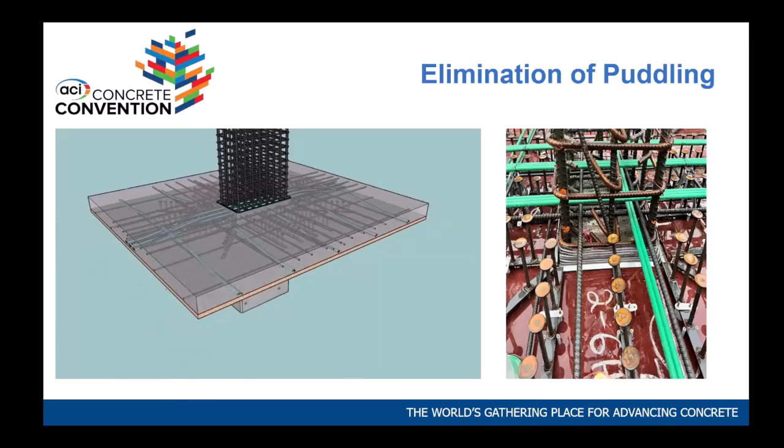So you could see it again, and that avoids the puddling. The trick was usually to put the stay form, but what they did here, they put that stay form first. You have to make sure you put the shear steel bars so that on top of the friction between the concrete, you have shear steel that passes through, like a midpoint bar that goes into that joint. Then they put stay form again up here after they put the top bars, and they pour it. Much easier than pouring two mixes and trying to intermix them. So that was a big thing on constructability and buildability.

Between the two walls, we put a special mix with high fibers, about 160 pounds of fiber per cubic yard. It's a very healthy fiber dosage, up to 200 depending what we need. But what happens is you reduce the rebar in that beam by about 40% from a typical beam, so it's much easier to place. You don't have the diagonal that clashes with the top rebar coming down. So it turns out to be a very constructible tool that streamlines the rebar of the core going up the building.

The neat thing about it, a lot of times you can pour this after the fact. What they do is they pump the wall with concrete, they bucket this with a steep bucket of fiber concrete, vibrate it, put stay form, and keep going with the building.

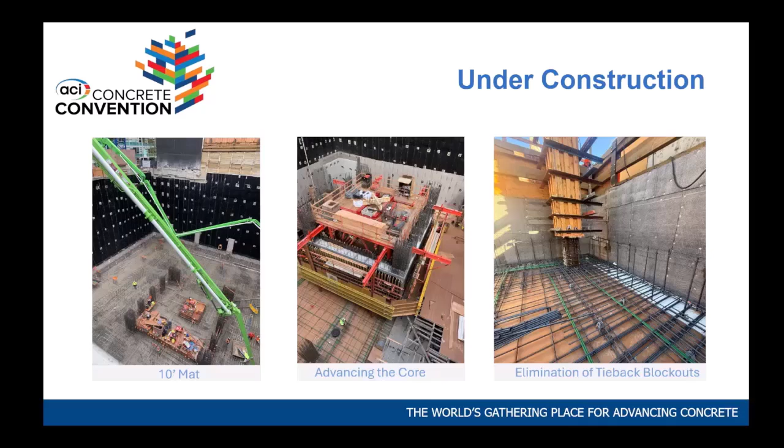The carbon reduction was interesting because just by using Type 1L cement, we reduced about 10%. We did the math, and that's about 450 tons of CO2 reduced right off the bat. Then being efficient with transfer beams and design, a lot of people don't realize carbon reduction potential.

You see all these highways and bridges, and the big question I always ask myself is how you can easily reduce carbon by making your design a bit more efficient—you can always reduce it by at least 10% with a more efficient design.

That was a big thing, and high-strength bars also reduce embodied carbon. Depending on how steel is made, either from iron ore or recycled steel, most of what we use in the Northwest is recycled steel, so there isn't a lot of CO2, but there's still some since you have to heat it, melt it, and transport it. Using high-strength steel reduces the amount of rebar used, which helps with the carbon footprint.

The project did great. We won the NAIOP High-Rise Residential Development of the Year in 2024. Last week we won the NCSEA, the National Council of Structural Engineers Associations award at a summit in New York—the Outstanding Multifamily High-Rise Project category for 2025, plus a few other awards and publications. We also got a CRSI Award in 2024, and yesterday we won the ACI Excellence Award, second place, but we're working on first place.